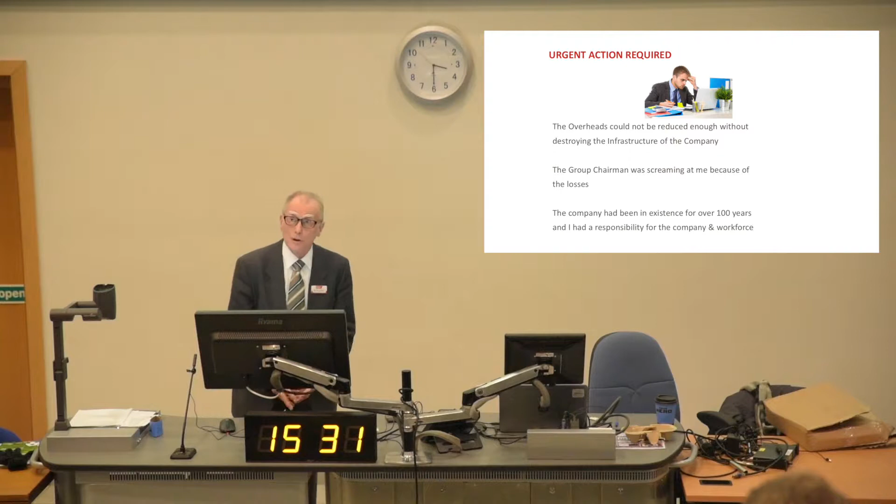I wasn't ready for it. It took me by storm. My sales reduced by some 40%. I reduced the overheads, but I was determined not to reduce them to the point that it would destroy the infrastructure of the company. And after doing so, I was still making losses, and I had the group chairman on my back saying that if I didn't come up with a convincing business plan very shortly, they would have to consider the future viability of the company.

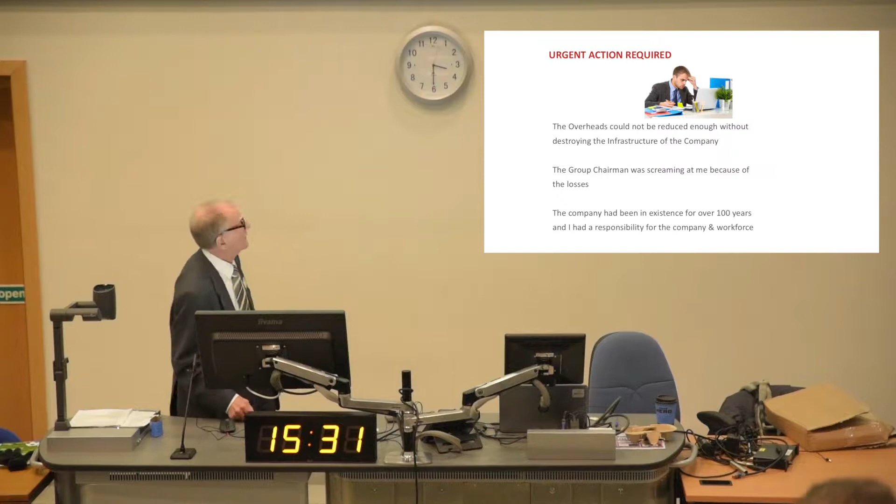So I had to find alternative products. I had to bring more products into the company. I said the company had been in existence over 100 years, so I had a responsibility. The expertise of the company was making gearboxes and designing gearboxes, and they were very good at that. But they had no experience in any other industry. So it was necessary to find gearbox products in other industries that was buoyant and that we could sell to, and that was no easy task.

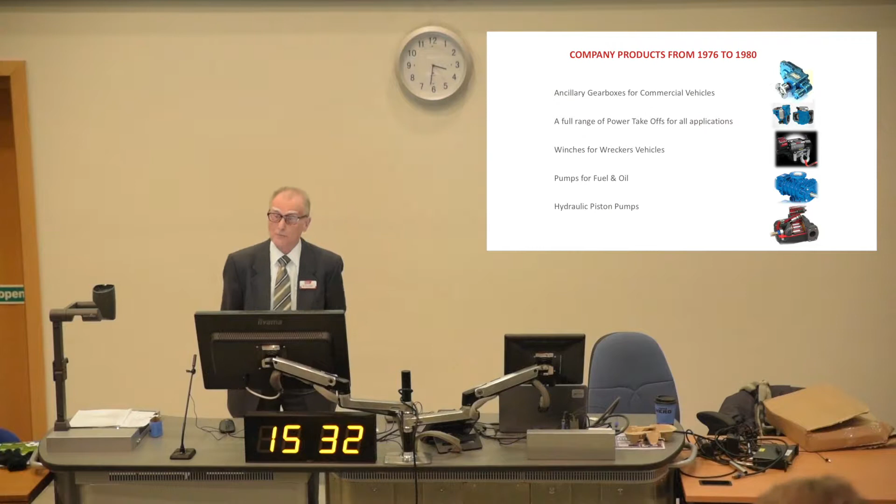These are the products that were manufactured at the time. They are gearboxes. The first ones are ancillary gearboxes that are supplied to the motor industry, quite often used to transfer the drive from the gearbox to the centre of the vehicle for the prop shaft. The power takeoffs are for lots of different applications, and we have power takeoffs for virtually every vehicle combination in the UK. Winches for wreckers vehicles, they're quite obvious for pulling vehicles out of ditches. They're used in the military for pulling tanks out of ditches and that sort of thing. Fuel pumps for aircraft refueling, for pumping oil, that sort of thing, and hydraulic piston pumps. So that was the general range of products at the time.

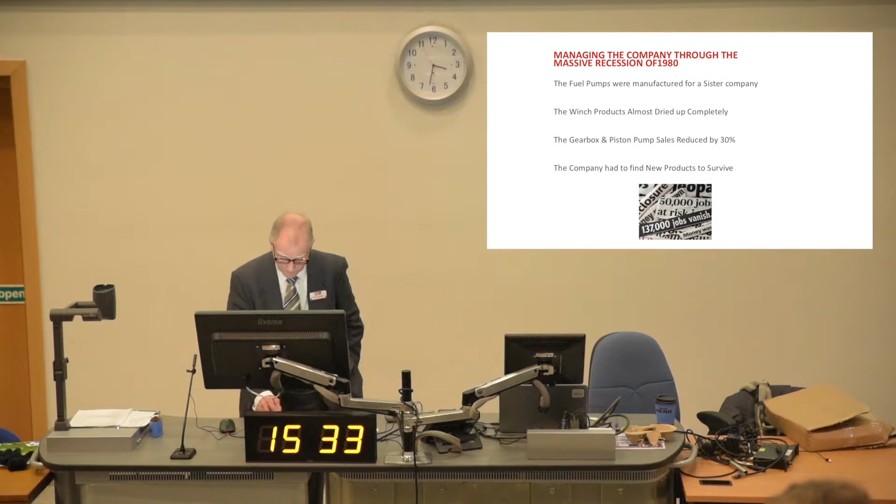The fuel pumps were not of our own design. They were from a sister company that we manufactured, and they were feeling the pinch of the recession, so they took them back. The winch products almost dried up completely because of the recession. The gearbox and piston pump sales, as I've said, they're reduced by some 30%, and the company needed new products to survive. So I had to look at other industries and try to find an industry that was buying gearboxes and to be able to produce them and sell to them.

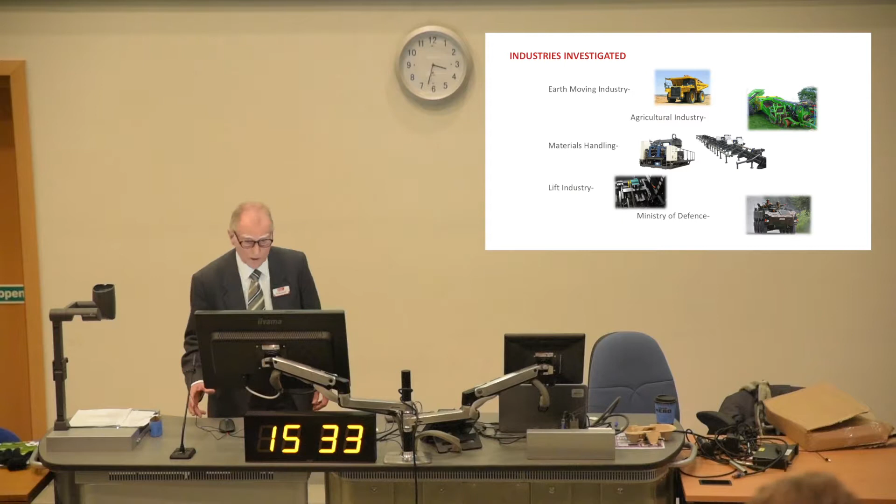No easy task. These are the major industries that I looked at, 5 of them, because all of them use gearboxes. And we very soon found that the lift industry was extremely busy in spite of the recession. And they were busy doing a major refurbishment exercise on the lifts that had been installed in high-rise buildings during the 1950s and 60s. As I say, the industry were extremely busy. But I couldn't just accept that and incur money and try to design a gearbox and supply to them.

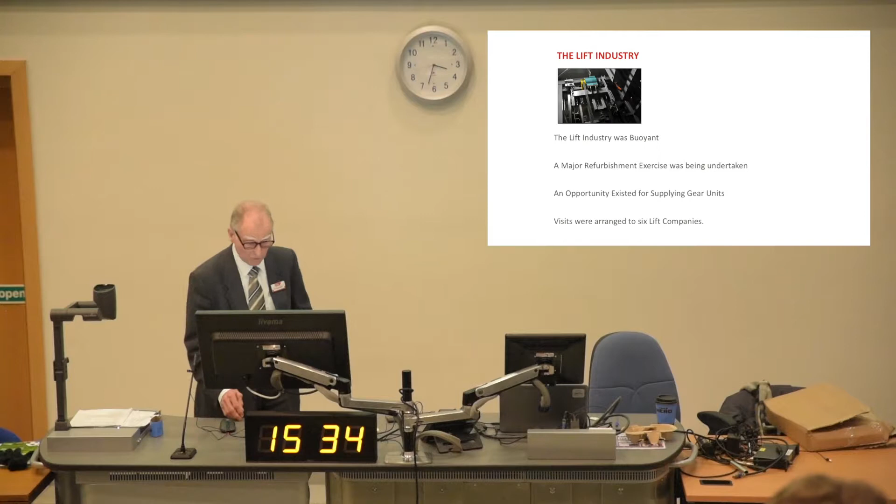So this is just confirmation of what I've said. I decided to visit 6 lift companies, and I visited the managing director of each of them. The first company I visited was Stannah. Most of you will have heard of Stannah lifts. I met the managing director, and I can still remember his name. It was Malcolm Colburn. And the first thing he did was confirm the buoyancy in the industry.

He said that they are snowed under with work, and he said that this refurbishment exercise was likely to continue for about 10 to 15 years because there were thousands of lifts requiring replacement now and a progression over the next 10 to 15 years. So that was a good sign. So I then asked him, where do you get your gearboxes from? And he said there are mainly 2 Italian companies who we buy them from.

I asked him, are you happy with them? Are they reliable? He said they're very good gearboxes, reliable, good quality, they don't really have problems. So I asked, do they satisfy all of your requirements? He said not exactly - there used to be companies who supplied gearboxes that really satisfied all their requirements, but they're no longer available. So I asked him to go through the differences with me.

We spent the next 2 hours going through these differences. At the end, I said if we produced a prototype and could demonstrate it had been tested thoroughly, met all the standards, and gave them all the things the other gearboxes lacked, would he give me an order for 2 prototypes? He said he would.

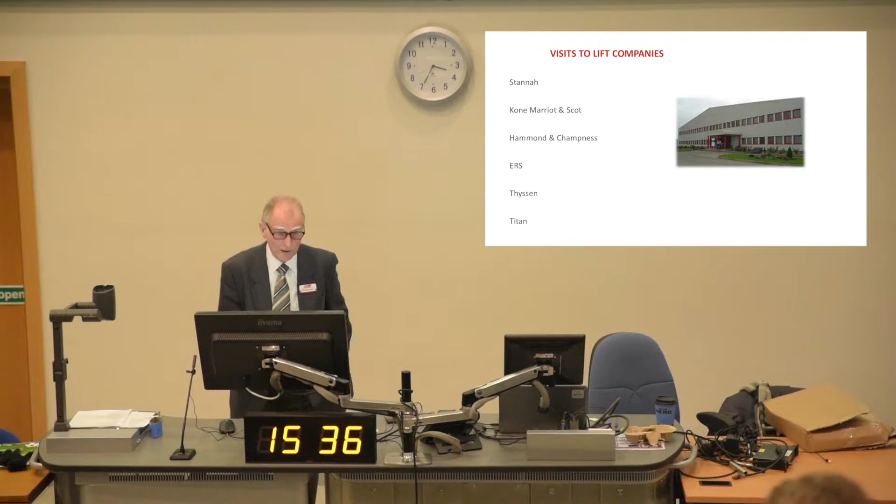So I went to the next company and had a similar discussion, and Kone, Marriott and Scot also agreed to give me a prototype order. They all confirmed the buoyancy of the industry. At the end of this exercise, I came back to the company with reams of notes and put together a specification incorporating as many of those features as possible.

I had no design engineers to design it, so I had to do it myself - my design engineers were working on the remaining motor industry work, and I certainly couldn't let that go. So I designed it myself, subcontracted the various component parts of the gearbox, and we built 2 prototypes.

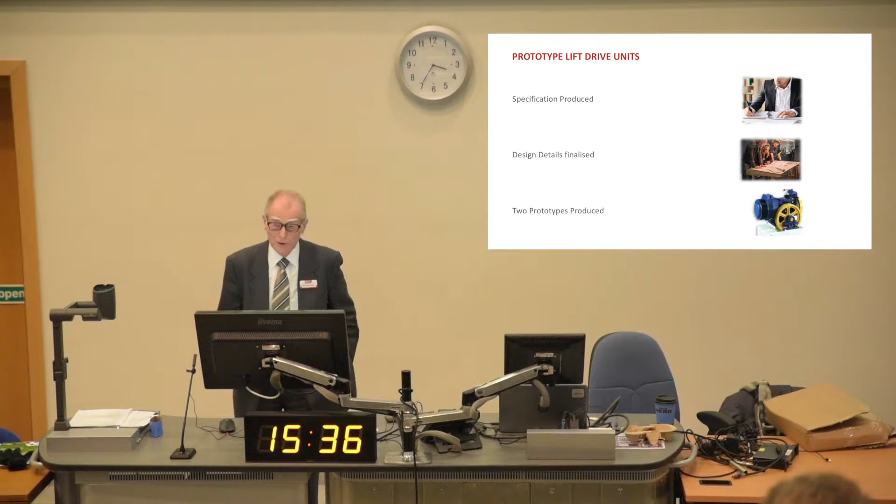I then hired a lift test tower - a 6-floor tower set up for an 8-person passenger lift, which was what we were designing the gearbox for. We tested the unit 6 days a week, probably 10 hours a day, for 4 weeks.

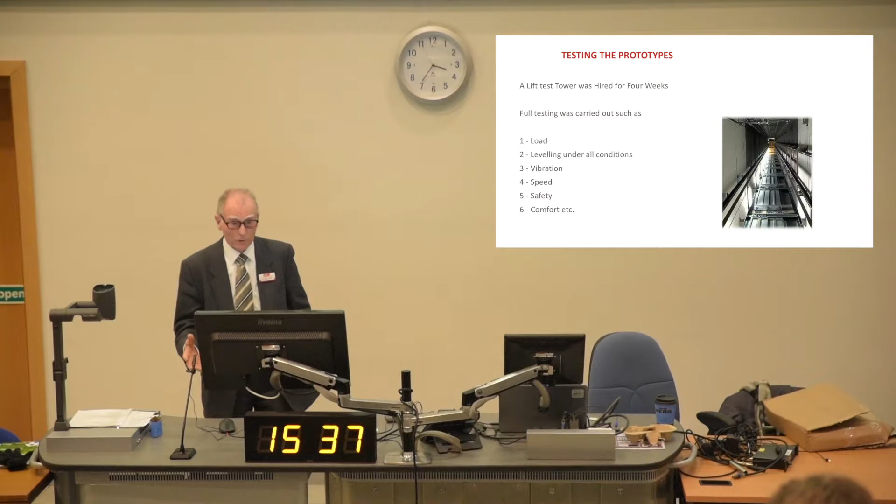I wanted to make absolutely certain that the prototypes we offered would not fail, that they would be right in every respect. At the end of 4 weeks, I was convinced we had satisfactory prototypes to demonstrate.

So I had a tow bar fitted to the back of my car. We put one of these units - very big units with a control panel, a mechanical control panel in those days - and took it to Stannah Lifts, the first company. They were absolutely amazed I'd done what I said I would. We coupled it up to a 3-phase supply and I demonstrated it, obviously not under load, but I had all the test results from the test tower.

Our company were experienced gearbox manufacturers, so we knew all the standards we had to maintain and work to. I demonstrated it to him, and he gave me an order for 2 prototypes. I went to the other 5 companies with exactly the same procedure and got orders from each of them. I came back from that trip with orders for something like £60,000, which was rather good for the company.

The 12 prototypes were delivered to the companies, and they installed them. This is just an example to show you a lift drive unit in an installation. They gave our company full access to monitor their performance, which we did continuously over a 3-month period. In fact, some of the people I had made redundant, I re-employed to go around on a daily basis monitoring these gearboxes. Again, I'm pleased to say they were successful.

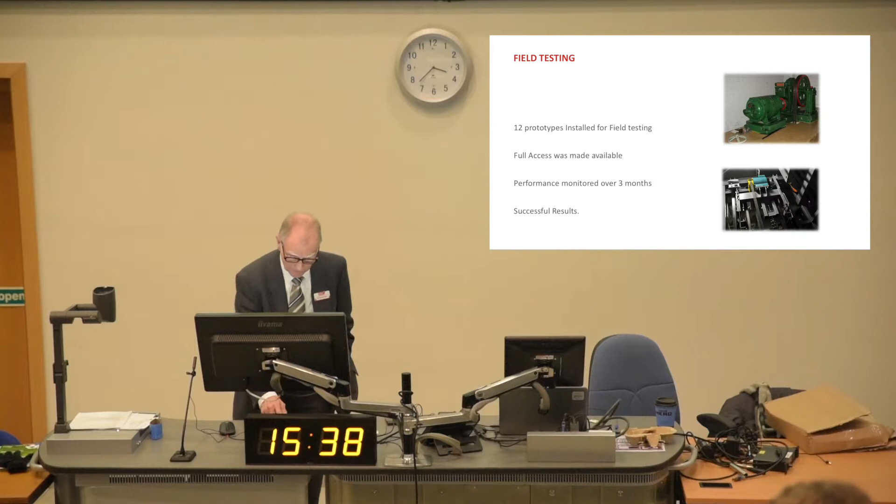After the 3-month period, we started to obtain quantity orders, small quantities, from these companies. Because we had a gearbox that satisfied the requirements of the industry, we started receiving orders from many other lift companies. In the Greater London region there were over 50 lift companies, which surprised me, but it was extremely good because I could go to London and visit lots of companies in a short period of time.

So we started supplying gearboxes for 8-person passenger lifts to the majority of the lift industry.

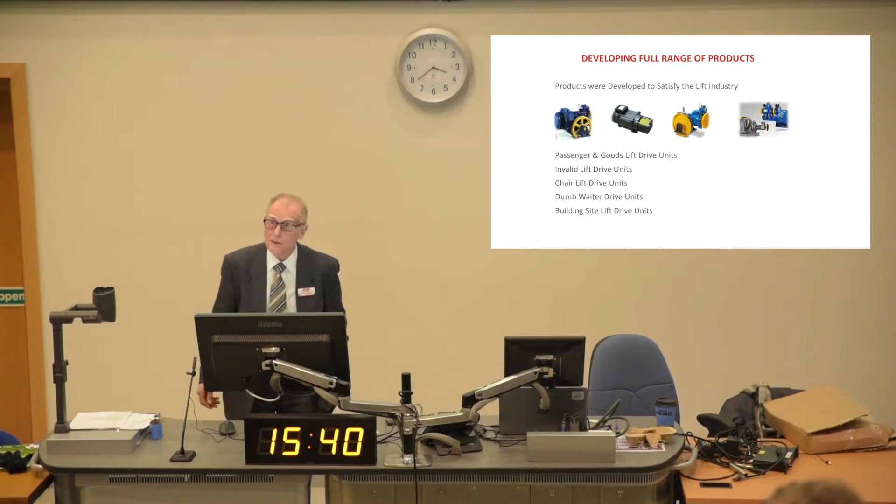Well, then, of course, it was necessary to develop a range of gearboxes. So we had to develop gearboxes for all of these 5 different types of lifts, because a lot of companies produced all of those types of lifts, and if we didn't supply all of them, we could only capture a proportion of the business. So we developed gearboxes for all of those types of lifts, and again, we were very successful in doing so.

The company was back into profit in 1981, which I was delighted to see, and virtually all of those people made redundant I re-employed, and I'm very proud to be able to say that. Some of them did very, very well out of it, because they came back after about 9 or 12 months. So they got a good redundancy pay, and then they had the job back. So they did very well, and I was quite pleased.

So we expanded the company quite considerably over the 1980s, and it was a very, very successful exercise.

The large companies such as Otis and Express, they manufactured their own gearboxes, but I was quite determined to be able to supply to those companies. So eventually I convinced the managing director of Express Lifts that we were better equipped to produce special gearboxes when they had a special requirement, which they did from time to time. Eventually he agreed to do so. So every time they got a special, we got an order for the gearbox, which was very good news.

But the one that I had the most difficulty with was Otis, the big O. Otis manufactured their own gearboxes, and they were very adamant they would never buy from anyone else. Their design office was on Clapham Road in London. So every time I went to London, I reserved 2 hours to go on Clapham Road to the design office of Otis. I went there so often that I got to know all of the people.

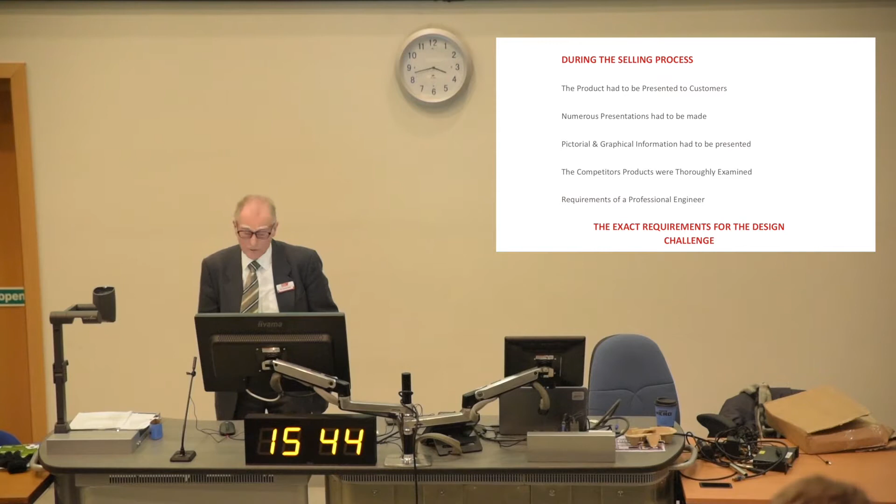So these are, of course, the requirements of a professional engineer, and they are the exact requirements of the design challenge, which is a challenge that I run for the institution with undergraduate engineers. And I'll come on to that shortly.

So during the 1990s, we started to, in 1990, the lift business enabled our company to trade through the recession without any, I think the sales went down maybe 5-10%, nothing to really get too upset about, and we didn't make a loss. We made a small profit during that recession. And it was really the lift business that helped us to do that, because we had products in an industry, or in part of an industry, that was still buoyant.

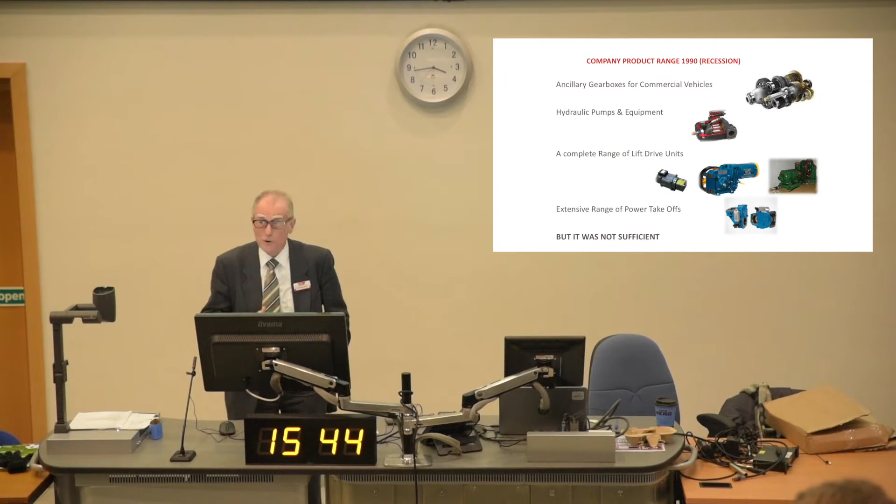But it wasn't sufficient, because when this refurbishment exercise ended, and it was due to end within the next few years, then we would be back to square one.

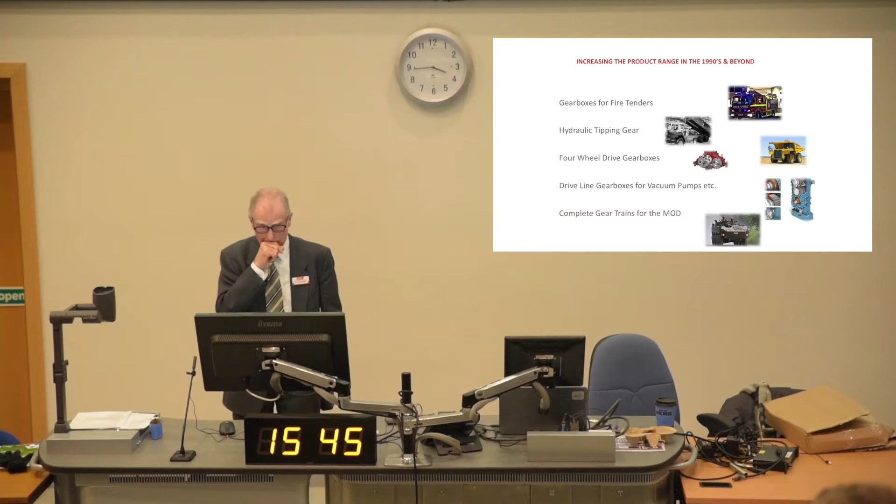I wanted to get business that was not affected by recessions to the same extent. If you look at this list, the gearboxes for the fire tenders are government contracts, quite often 3-4 year contracts. So if those contracts have been placed and the recession appears, the industry is still buoyant because of the contracts they already have.

The bottom one you'll be interested in - we manufactured the complete drivetrain for the 8-wheel troop carriers. That is the link gearboxes, differentials, the axles, etc. That's very lucrative business, because again it's not affected by recessions, it's long-term business, and if a recession appears, it continues because the orders have already been placed.

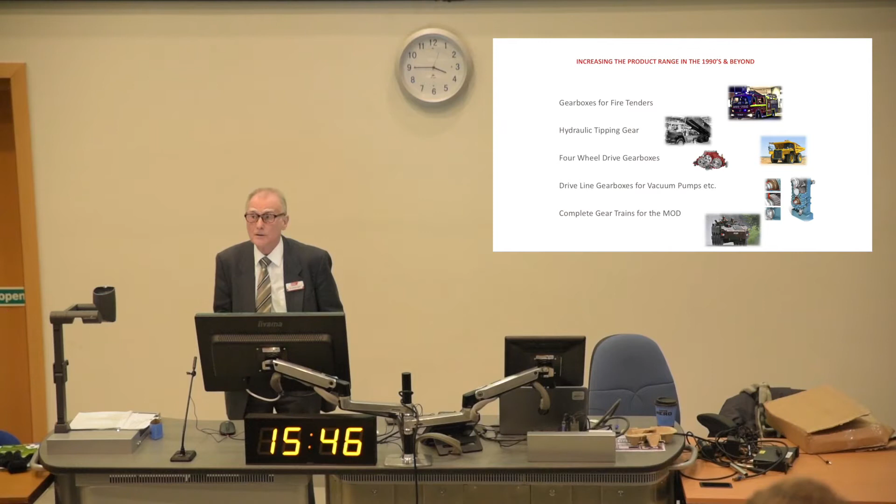So that is what we did during the 90s. And that meant that in the recession of 2008, with all that range of products, we were able to ride through it without having to make anybody redundant, with probably a slight drop in profit, but nothing too significant.

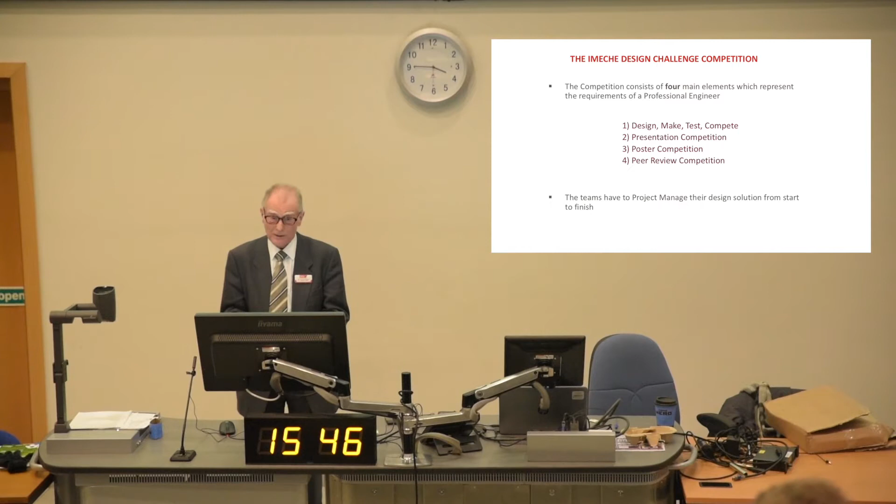Now, I mentioned the design challenge. The design challenge has got 4 main elements to it. First of all, we give a detailed specification to teams of undergraduates, first-year undergraduates. From that specification, they've got to come up with a design solution. They've got to make it, they've got to test it, and they have to compete internally.

And the 2 teams that normally win the internal competition go to a regional competition run by the institution at one of the universities. And the competitors have got to bring their design, their product with them, ready to test.

They've got to do a presentation of their design to show the technical features, etc., and the engineering science that underpins it. They've got to do a poster, which is the brochure with pictures of what they are doing. And they've got to do a peer review where they examine the designs of all the other teams and rate them accordingly. They also have to project manage the project from start to finish.

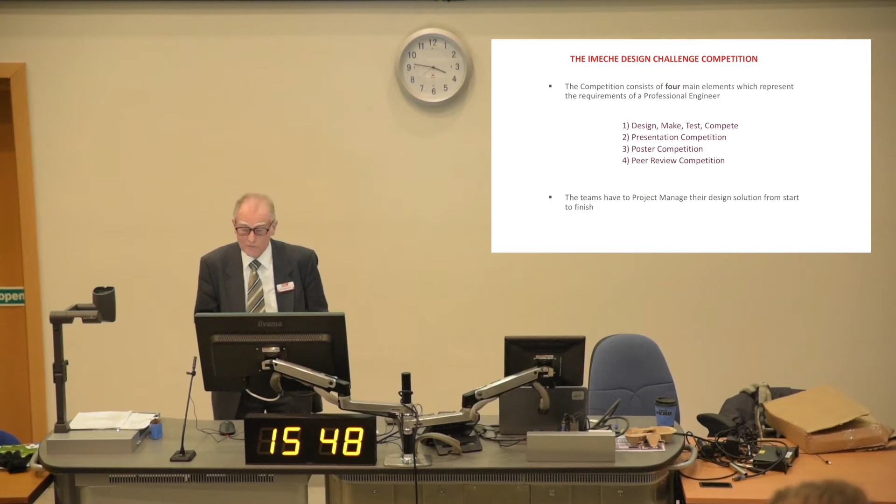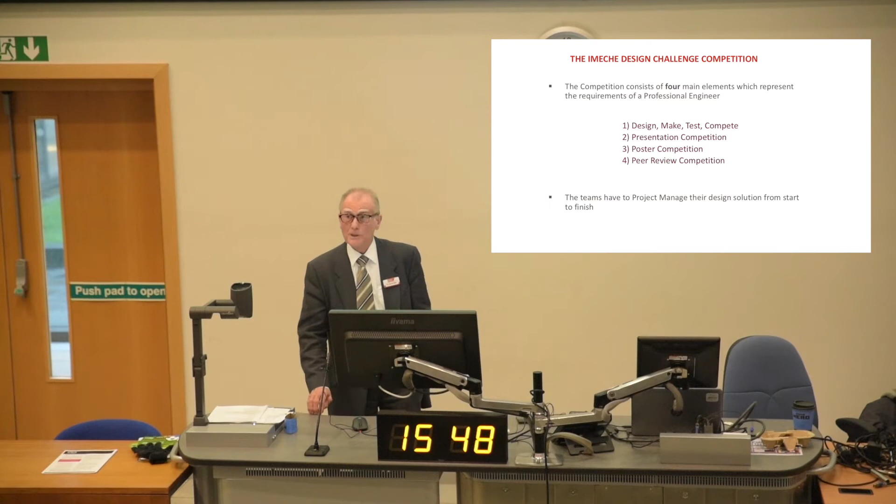It's a very, very interesting competition. In fact, the competition in the Northwest region this year is on the 7th of March at the University of Manchester. Anybody who wanted to come, you can certainly come along. It starts at 10:30 in the morning on the 7th of March.

So now, the application of the design challenge. I referred to transfer boxes - these are some of them. The one at the bottom left is actually a 4-wheel drive gearbox.

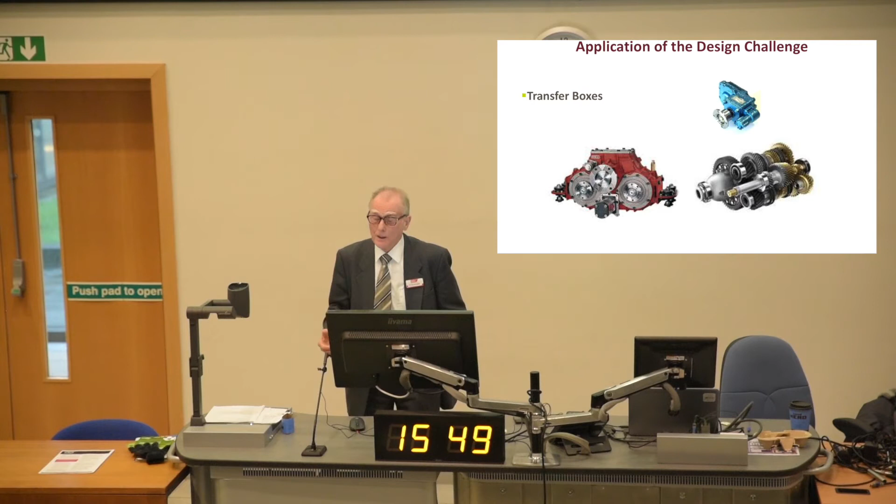These products are normally at the request of the motor manufacturer, who would require a gearbox to transfer the drive to do something, 4-wheel drive to drive something, and then our company would design it and present the design to the motor manufacturer, and then produce a prototype, and we'd have to do presentations and so on. In other words, all the things of the design challenge.

I referred to the power takeoffs. Those were products of our own company, but we had to make sure that they fitted to the gearboxes correctly, and they were available for all the different types of ancillary equipment that can be used on the commercial vehicle. So once again, we had to go through the same process of the design challenge.

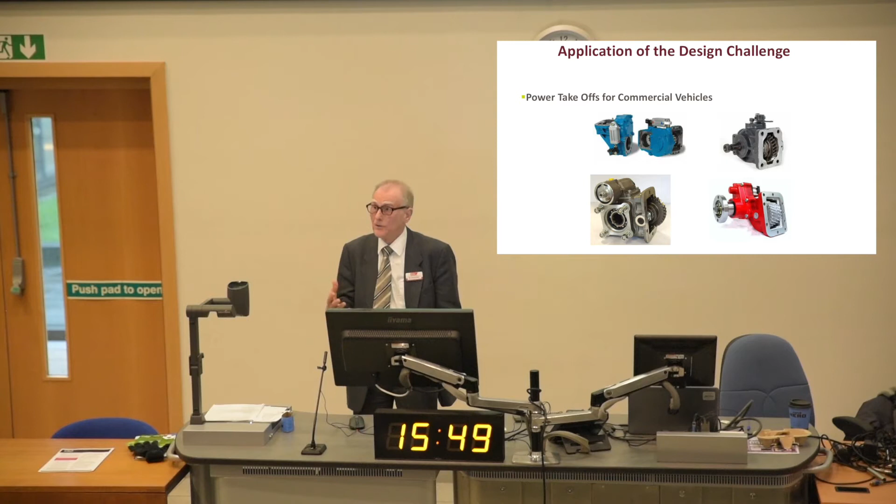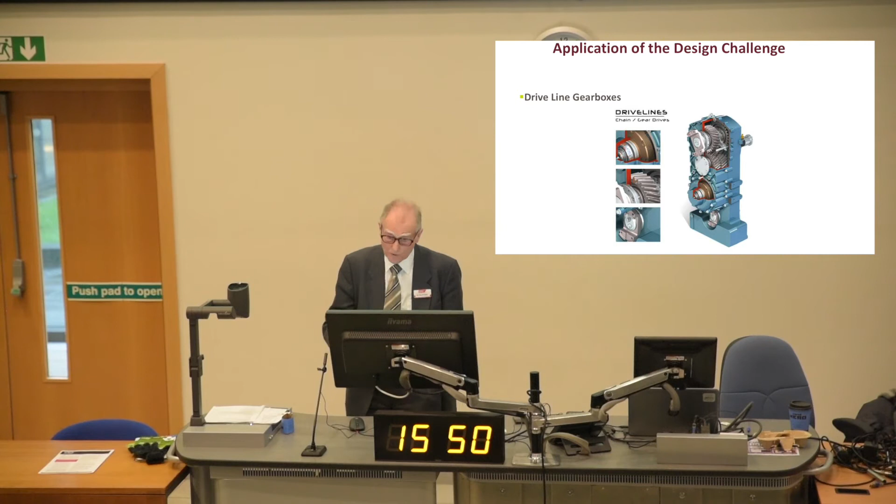And if it's designed correctly, you can actually transmit the full engine torque. So it's a very versatile gearbox, and providing it will fit, you can put them on any vehicle, and there are lots of different sizes of them. And then of course the lift gearboxes - I've explained how we introduced the lift gearboxes and how they fit in with the design challenge.

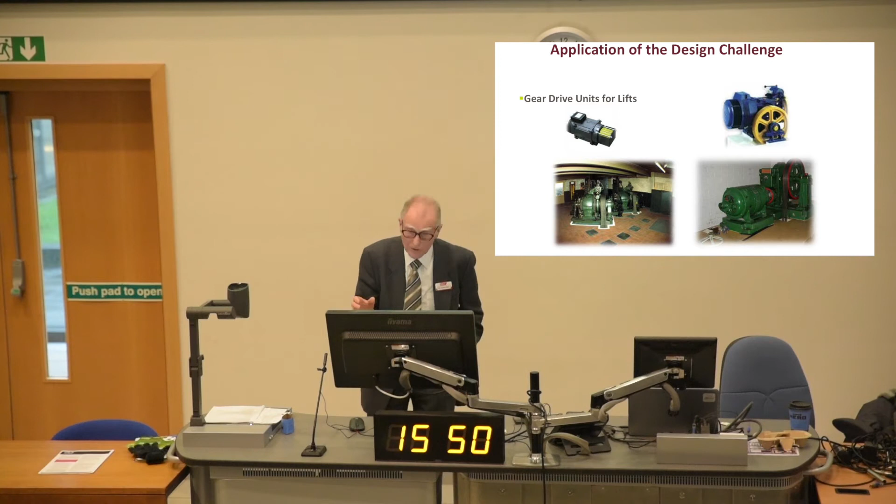So, lessons learned. Getting accurate information is obviously important, because in the lift business, if I hadn't got the accurate information for the specification, it wouldn't have worked. Thoroughly testing the prototypes was also key. If those prototypes had failed, we would have been dead in the water, with no way we could have proceeded. So I made sure they were tested, double tested, triple tested, to make absolutely certain they were right before I offered them to the companies.

Differentiation. I mentioned before that the companies had said the gearboxes they used to buy were different. I'll give you three examples. The first was that they wanted plain bearings on the output shaft. They said the gearboxes they were buying had taper roller bearings, which are very quiet and smooth, but not as good as plain bronze bearings, because the load capacity is higher and the vibration is much less, and therefore that's what they would like.

Secondly, they said the gearboxes they used to get could not start from the output shaft. In other words, no matter how much load you put on the output shaft, the gearbox wouldn't start, because of the wedge action of a worm reduction gear set. The gearboxes they were buying had a lower ratio worm reduction gear set and then a train of helical gears, hence you could start it from the output shaft. The advantage of their design was that you could have a smaller motor, it didn't need as much power, but the industry didn't like it, because having the facility to sustain the load on the output shaft is an additional safety feature, which is important. It also helps with deceleration, making it much smoother, because the worm set is also creating that.

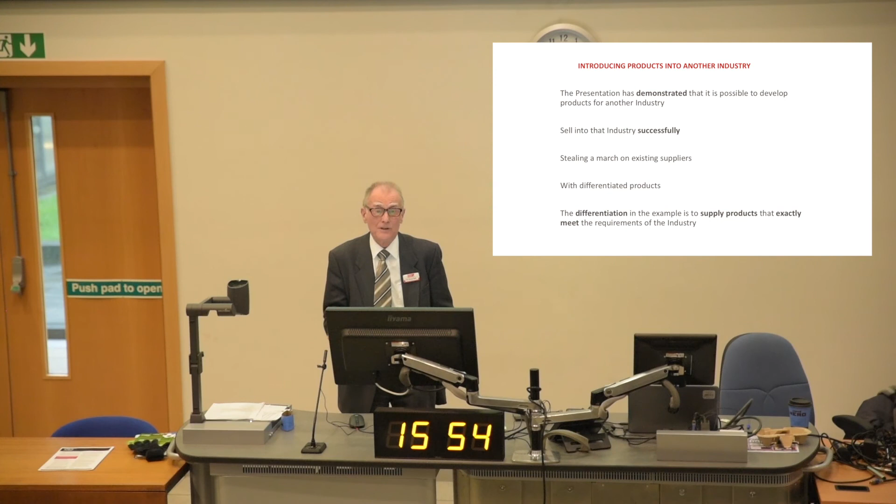Because I was quite aware if we got it wrong, we would not survive. My back was against the wall in 1980, because had they failed, our company would have failed. I'd have lost my job. The whole thing would have gone to the wall, and I couldn't allow that to happen. So obviously, you can steal the march on existing suppliers, as I've demonstrated, with differentiated products, and I've explained the differentiation that we introduced.

So in conclusion, it's good to concentrate on core products. You will hear many large organisations say that companies should concentrate on core products and become very skillful at producing them, and I agree with that. But it's also beneficial to have diversity using the same technology. In our case, gearboxes - it doesn't matter whether it's for the lift industry, the motor industry, or whatever industry, they're gearboxes, and therefore you use the same technology to design and produce them.

Recession cycles are not the same in all industries, as I've mentioned. There are parts of the motor industry, like the earth-moving industry, where the recession is not the same as the recession across the rest of the country. And of course the military is another area I mentioned. So that's an important feature. By having the right balance, it is possible to trade successfully through a recession, as I hope I have demonstrated to you. Thank you.